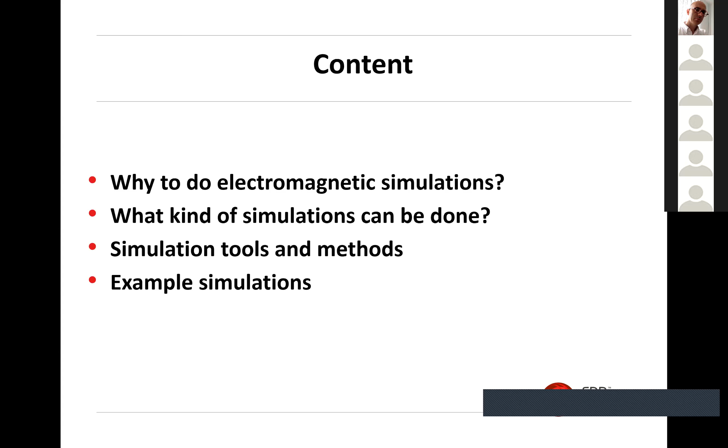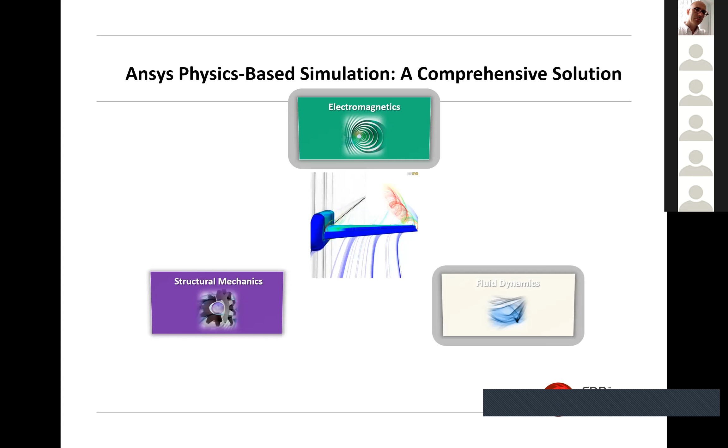So basically, if we are thinking about this simulation area, we can roughly split it in three. We are speaking about mechanics, fluids, and electromagnetics. And it's not so that we are just doing a single physics. We can also send data. The simulation tools can share data or even have dynamic links between. So nowadays we are many times doing multi-physics, so that we are coupling.

For example, if you have high power electronics, like power electronics, it will heat something, and then you can have structural changes, warping, expansion, shrinking, and basically that will change once again the RF frequency, for example. On the other side, we need to cool down electronics. One of the main design limitations nowadays with electronics is the heat. And for that, we need to control airflow, liquid cooling, and that's where the fluid dynamics comes really heavily on top of the electromagnetics.

So we are able to do different kinds of simulations for the same kind of applications, systems or products based on the same CAD data. We can use the same CAD data for electromagnetics and fluids as we are using for mechanical simulations. And there's a huge number of different solvers, principles, mathematics you can do simulations with. This is just giving you a small snapshot of mechanical simulations, and where you can apply something like that.

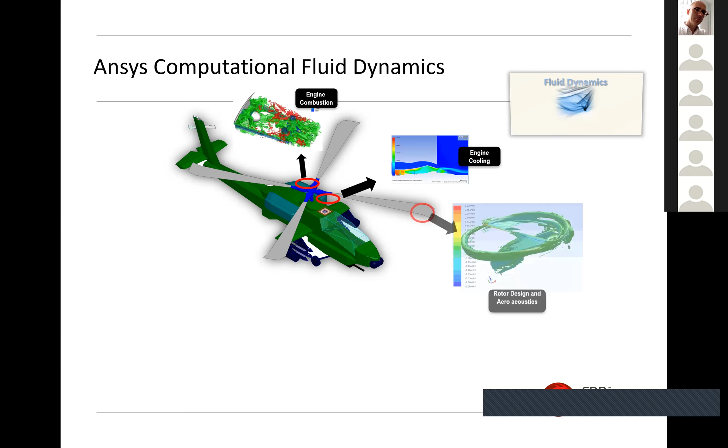The same for the fluid. We have the engine, combustion engine, like how the gasoline will burn inside of the motor. Then we have cooling. We have the rotor design, acoustics design, and of course we have the airflow, friction, aerodynamics,

and then we have complex scenarios where the environment will affect the helicopter airstream, for example, when you are landing to a closed small area, plus the wind, of course, and so on.

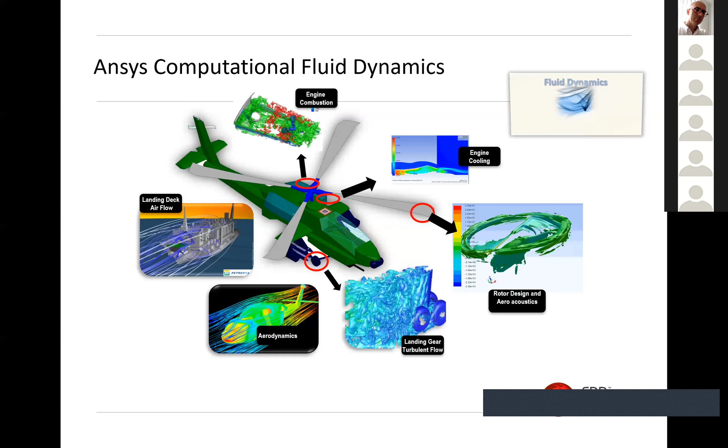For electromagnetics, we can use the same CAD once again. If I'm saying the same CAD, I mean the body, of course; the more you go to details, the more detailed CAD data you need, for example, for the electronics here. Antenna arrays: you can analyze where to place the antenna.

Actually, most of these tools are based on space and military, and that has been more or less the driving force to do simulations for electromagnetics already since 1960, 1970. And a single helicopter or fighter can have something like 15 antennas active at the same time. And the idea is that all the antennas can work without coupling to each other too much.

So you have really extremely sensitive passive antennas and beside that, you can have hundreds of watts or kilowatts power radio communication antennas. So we have a huge scale with the radio signal electromagnetic waves on top of the helicopter surface and close to the helicopter. So that's one huge area.

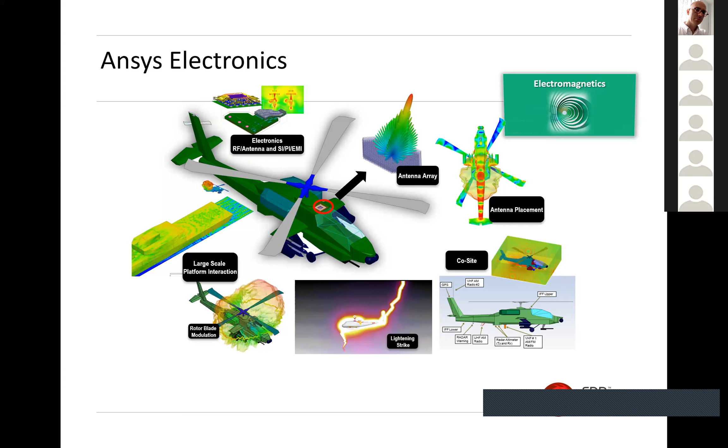So this slide, basically, is about different electromagnetic simulations. Typically, we can think about electromagnetic simulation with any platform from Ansys or other suppliers. We can split it into 4 main groups. In this case, HFSS is the high frequency

Any electronics you design more or less needs to consider heat somehow. Maybe the only area where heat is not a main challenge is passive RFID antenna components or something where you have extremely low power levels. But even there, the temperature and frequency dependency exists. So if you have an extremely hot surface, your antenna tuning can shift to the side. So you have to think about temperature all the time with electronics.

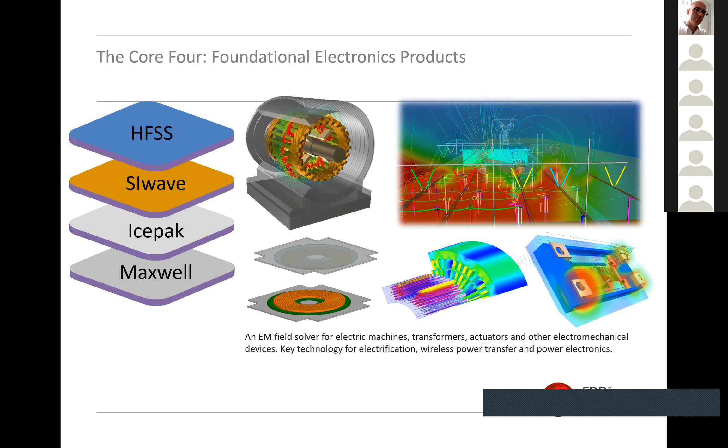So basically there's four: high frequency, circuit boards, cooling, and low frequency electronics. SI-Wave and HFSS are actually both doing high frequency and low frequency, a bit the same way as Maxwell, but Maxwell is specialized on that. On top of that, SI-Wave is only doing circuit boards, whereas HFSS is full 3D, where you bring in full 3D CAD. SI-Wave takes circuit board layout data and it's optimized for that. And there are specific reasons for this split, and I will go through the details later on.

Okay, this is just once again a little bit more detail on this split. So HFSS is high frequency. And you can do even circuit board simulations with HFSS, but the main challenge is that if you try to do full circuit board simulations in full 3D, it's too heavy for computers. You have to simplify something, and that's why we have specific tools for circuit boards.

In the low frequency range, we need to use different techniques and physics when we are analyzing, for example, electric motors. Nowadays electric motors are a heavy area for simulations because of the electrification of vehicles and cars; even heavy industry systems are starting to use electric motors more and more. So efficiency is number one. And then comes the heat, which is solved typically with Icepak.

Of course, you can do some of these simulations in 2D, just taking a cut plane and doing simulations. But as you can see, the electric motor here has a 3-dimensional shape. And you have to think about how these electromagnetic waves, or mostly magnetic waves in this case, are bending in different areas of the motor in order to optimize that. And these are extremely heavy simulations. You need lots of computing power, and you have to have a highly detailed model of the motor, the windings and where the magnets are. And typically those materials are also non-linear, which makes it quite challenging.

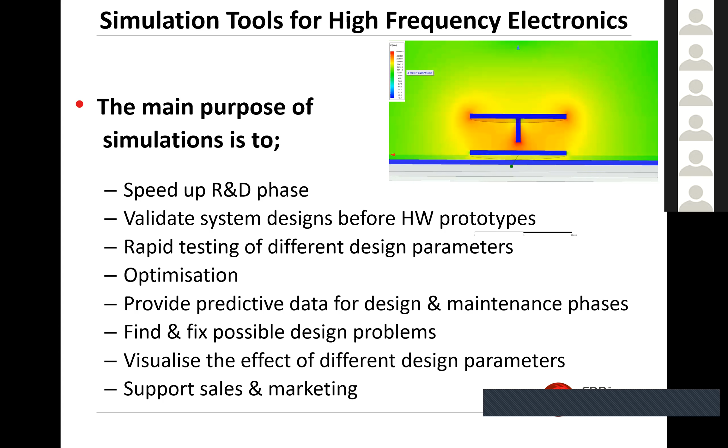So basically you can visualize what happens when something is moving, when something's touching, sending a radio signal or something like that. So you can get nice pictures. So it's a sales support.

Related to R&D speed and costs, EMC is one specific area. It's part of the qualification of electronic systems or even components. So you have to do that with measurements. Basically you have to go to a specific lab with specific tools to do the qualification. And typically the system is already done. It's ready, or at least a prototype when you do this. You can't do that without hardware.

So it can be really expensive to do these tests. And sometimes these labs are occupied most of the time, so you have to reserve the time 2 months ahead. So one way to limit the need for hard testing is to copy-paste the EMC lab and do the same in simulation, and try to predict as many problems as possible with simulations. Then the measurement qualification is just to verify the results and fix, hopefully, minor problems which are not visible with simulations.

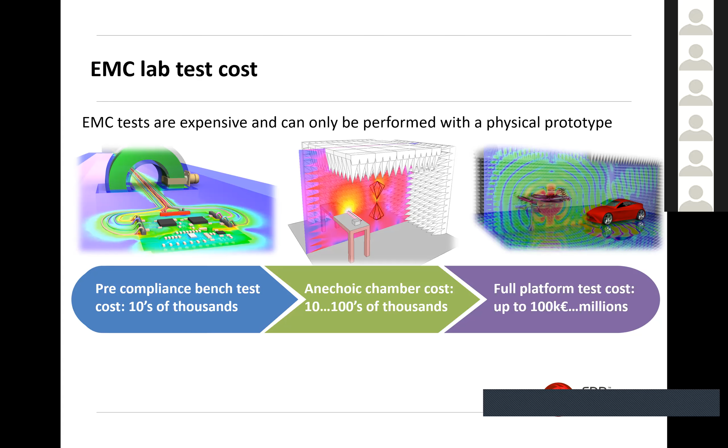So when we're speaking about electromagnetic simulations, we are not speaking about a single product. We are speaking about a family of different tools, different software packages. And the traditional challenge is that each of these tools has had a different user interface, a different way of using it. And industry is now moving heavily to use platform simulation systems.

From Ansys' point of view, this is the Ansys Electronics Desktop, which means basically that you have a single user interface for most of the software packages. So you don't have to learn different user interfaces, where to open the files, how to bring the CAD data inside. It all works the same way.

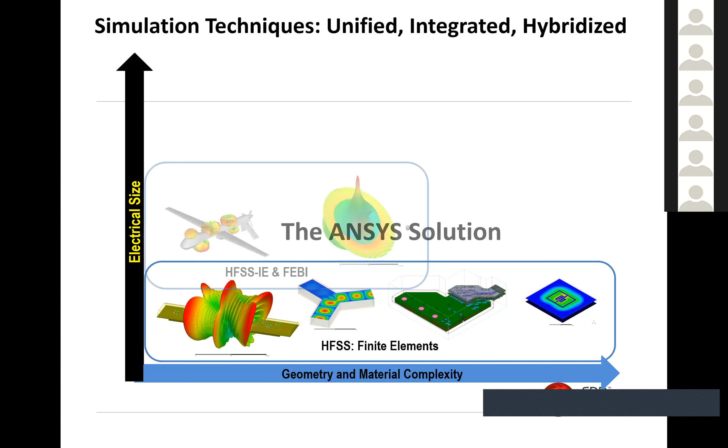So basically, you can do simple things and complex things with the same software package. And then if you go to larger scale, bigger designs like airplanes, cars or something, you slightly need to change the math you're using.

In the lower row here, we are using full 3D electromagnetic simulations. In this layer, you can see things like HFSS IE and FEBI. I'll explain a bit more about that, but we are doing simplifications with the CAD in order to handle bigger systems. The problem is these are 3D environment simulations, and in 3D, if the size increases and the frequency increases, you can think about how many small details you have to include in your simulation. And it gets heavy to do the computing.

Then if you go to even bigger systems, once again you might need to change the math. You can still maybe use the same software, but you're using a different solver, and different solvers use different mathematics. With shooting and bouncing rays, you can think of that like a laser beam or LIDAR principle - you're shooting electromagnetic wave radar lines in all directions, and then calculating how the electromagnetic waves behave. So we're not actually modeling the whole 3D space, the volume, anymore. We're just approximating that we have air, vacuum in space, or seawater under the sea. So you're just approximating the media between the antenna source and the target.

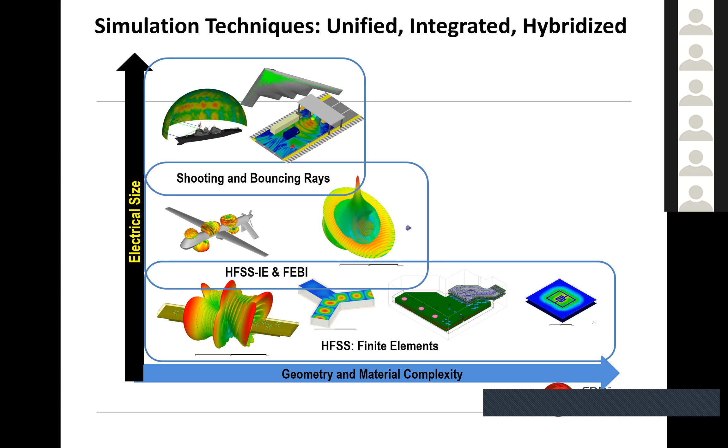And then you can combine this. So you can really combine really high detail, small array antenna and an airplane and do the simulation on that. Once again, you are not switching the physics to different solvers, but bringing this high detail solution, this component, on top of your airplane. And you are modeling the airplane with a different solver like FEBI, which expects that the surface is conductive, like carbon fiber or aluminium. If it's conductive, we can simplify the math and see how the electromagnetic currents and surface charges are spreading on top of the airplane.

And if we have a second antenna on the tail, we can see how much this antenna is coupling to that antenna by just following the surface currents and the radiative signal, if that's a key coupling principle. So basically, yes, we can do a lot, but we have to know how to do it. We have to combine different mathematics solvers and maybe use them in parallel on top of the same design. This is the magic we can do nowadays with simulations. We don't have real limitations anymore because we have so many different solvers.

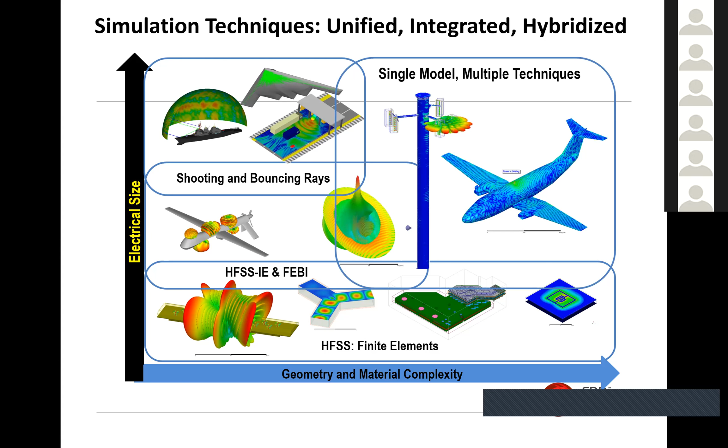So once again, a short summary. We have HFSS with the finite element feature. This is the full 3D heavy simulation principle, the most accurate way to do it, and it can also handle circuit boards if the board is small. Then we have SIwave, which can do really heavy circuit board simulations using different math, simplifying something. We have Q3D, to get RLC, resistor, inductance, capacitor models out of complex 3D structures. SPICE we always use for circuit simulations, trying to do all simulations as simply as possible. And then we have specialized EMA 3D, for cable, EMC, and coupling noise simulations.

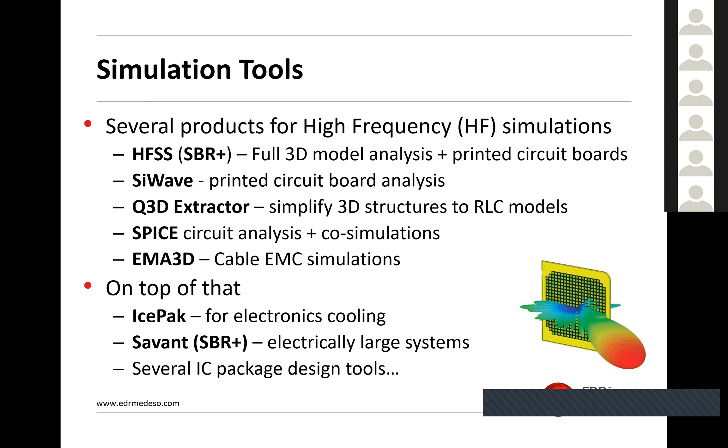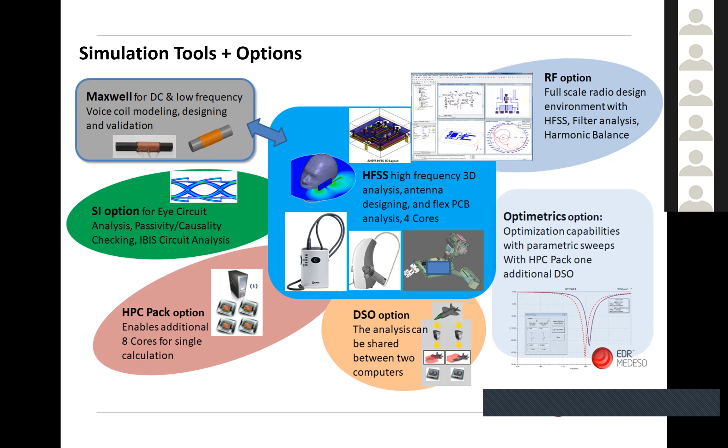So basically, we always have a core software package, and then we have add-on options on top of that. So we have the core, and you will typically buy, or it's integrated into the software, different sub-functions we can call toolkits. For example, you can do eye diagram simulations, or optimization with Optimetrics, a tool designed to make variations easy and efficient, like design of experiments. Then you can have RF tools, especially for microwave designs. Then you most likely need cloud computing with distributed simulation, splitting the design into small pieces and sending it to, say, 200 cores or GPUs to do the calculation. So every software used for simulations nowadays has add-on toolkits bringing extra features, more functionality, and making the software more user-friendly.

So looking at what type of simulations industry does, we more or less always start from SPICE, circuit simple 1D or 1.5D or 2D, however people think about this. It's based on simple RLC analysis, just conductive waves, electromagnetic waves, no radiation, no coupling, nothing. This is idealized, and you can do quite a lot with SPICE. Basically, the SPICE circuit also comes free with any 3D simulation software package you buy or have access to, it will always include SPICE. And there's a main reason for that, and that's the little rectangular box here.

This is actually a parameter file, explaining frequency dependent, maybe nonlinear behavior of some specific component in your system. But the power supplies and the load can many times be simplified with resistors, capacitors, inductors. And of course you can have transmission lines, switches, any active components. You can bring even IBIS, small signal behavior models inside, and so on.

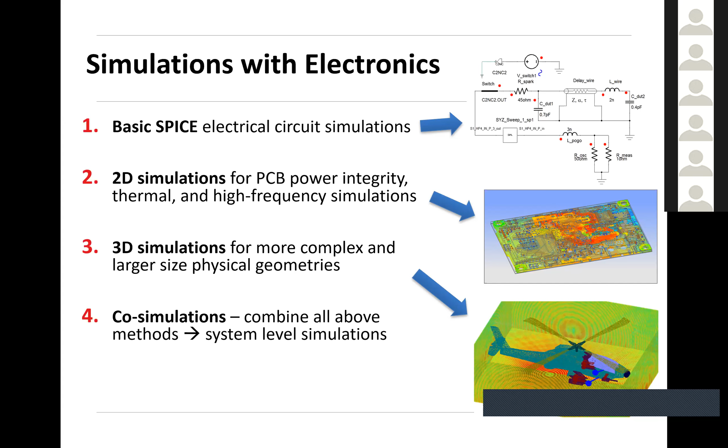So thinking about different simulations, typically they focus on, let's look into the industry, what they do the most with simulations. Everything was more or less starting up from antennas. So a simple monopole antenna, you can do with basic analytic equations, and you will get more or less accurate results. But as soon as you bring several antennas together, close to each other, or you bring different surface materials close to the antennas, it will change the behavior of the antenna, and it gets really complex.

As soon as you go to array antennas, it gets so complex that you need software to do the simulation on top of the 3D behavior description of the antenna. So they are using simulations to optimize antennas. They're looking how strong signal you will get from antenna to antenna. Or if you are an EMC guy, you look at how much the antenna is giving noise to my sensitive signal traces on the circuit board, or to the other antenna, or how much emissions you will get, or how well it survives the immunity tests, and so on.

Then we have the huge second area, which is EMC. A sub area is the electrostatic discharge.

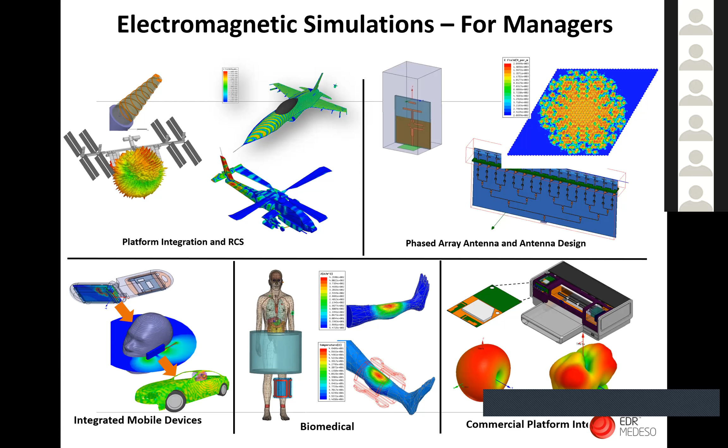And engineers, we like numbers, pictures, where we can see the value. So this is typically what we are looking for: 2D graphs, radiation pattern, gain, S parameters. S parameter is, in high frequency, the de facto simulation outcome, or impedance, or in the time domain, we are looking for reflections and bouncing of signals and so on.

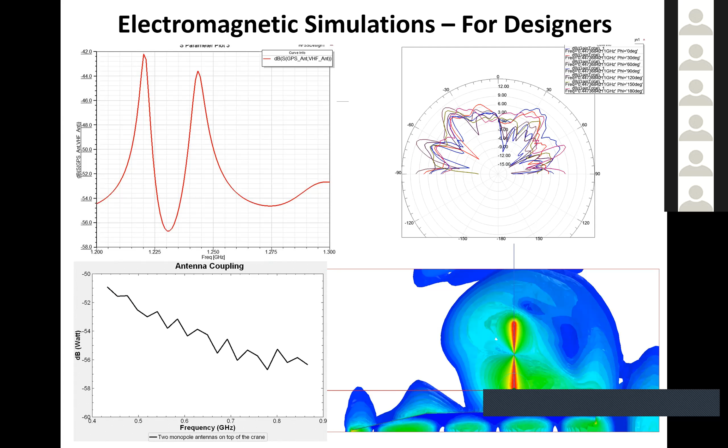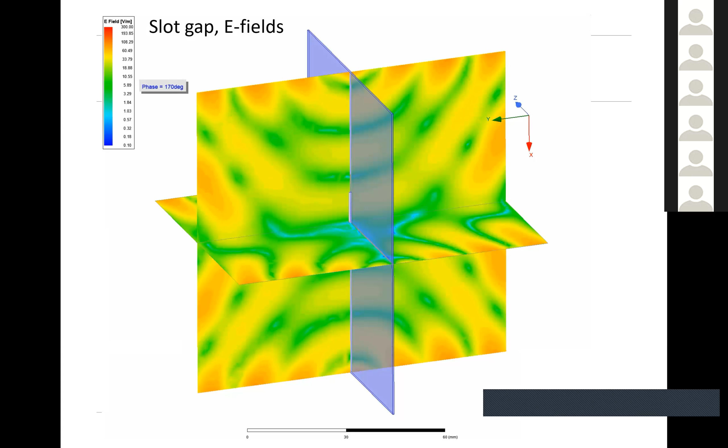We can also do kind of what-if analysis. Like in here, we have a slot gap in a metal plate, and how much signal you will get through the slot, and the signal is coming from the right side, and the left side is the leakage. So it's really easy to do visualizations and measure. So we can measure any point in this design with simulations, which is really hard with measurements.

In the future, I can see that simulations are more or less the #1 design tool for electronics. It's shifting heavily that way. So you will start with simulations and you end up with kind of measurements. You are just verifying that the results are correct. And based on the measurements, you will do maybe small minor improvements in the design, and that's it.

And it's going to be more automated, more user-friendly, more toolkits are actually helping with that. And you will get more and more accurate source data for your simulations. You are going to do more multiphysics in general. Of course, some specific designers focus just on the eye diagram, and that's what they do. But many other people need to combine different solvers, different solutions together.

Why more simulations? Also, the frequencies are going up. We are now moving to higher and higher frequencies because of data speed, and because there are more free frequency bands. We have already occupied more or less every usable low band, let's say below 2.5 gigahertz; we are already using all the frequency bands existing. Not always in an efficient way. So we are changing those, some frequency bands are kind of left free for different applications.